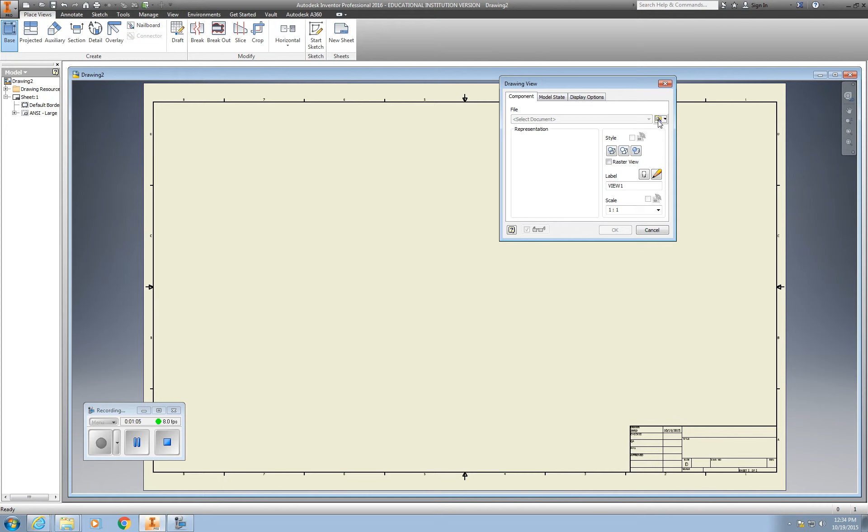First thing we want to do, if you look at your sample drawing, is we want to make it look like the following drawing. So I'm going to go up to base, and I'm going to the little magnifying glass inside of a yellow file. It's an existing file. And remember, keep all the files closed. We will go find them in this way. So I'm going to be looking now for our part 1.

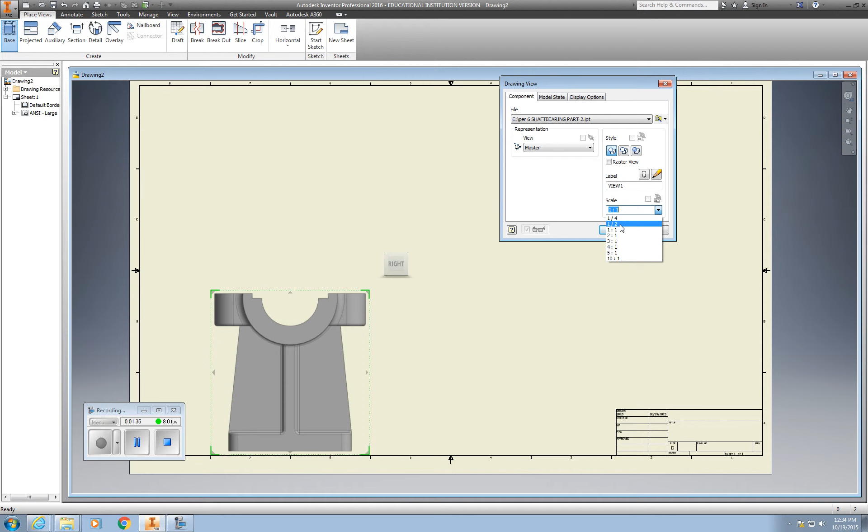And it's going to look like this. And that is actually the scale we want to use. Now I do want to turn it, so before I place it, I'm going to rotate it in this fashion. And the scale for this will be 1 to 2. 1/2. So then I'm going to go to the right, and I'm going to drop my right side view. I'm going to go up above and drop my top view.

And once the three are there, I'm going to come over and I'm going to place my isometric view right here, and then right click OK. So now those three parts are made the way we want them, and they're in hidden, as you can see, with the wire frame on. Now, that is the part 1.

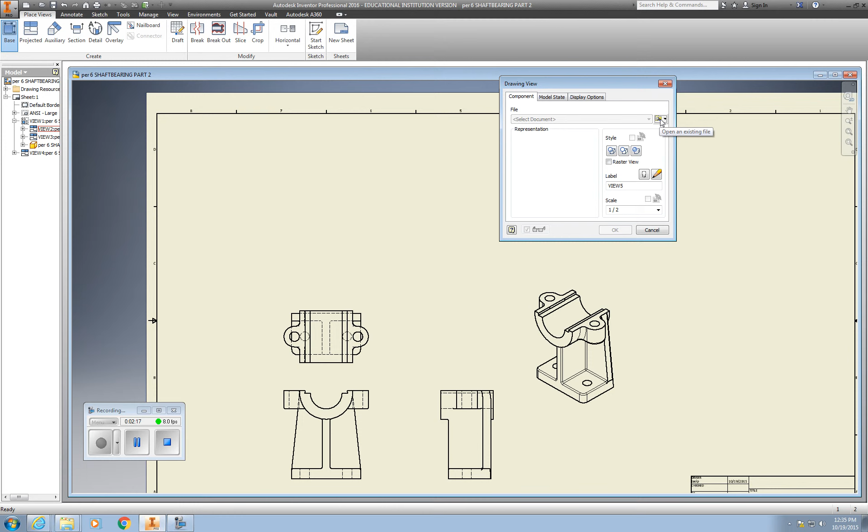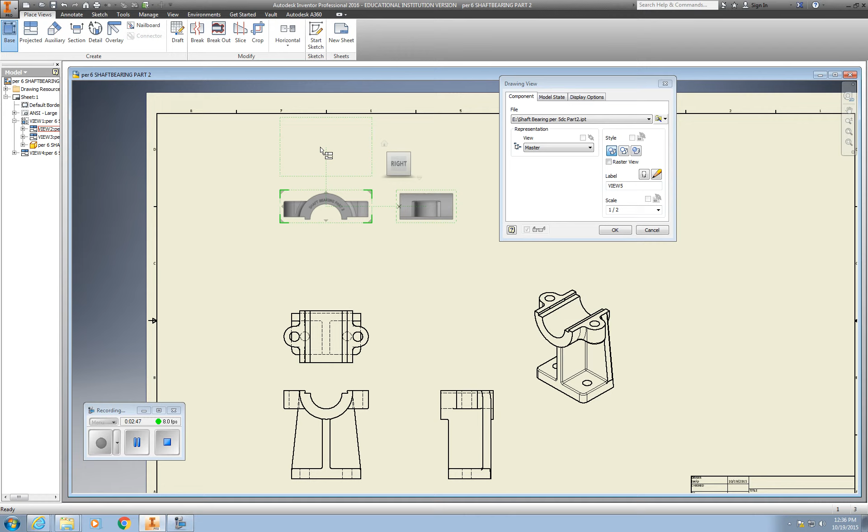I want to bring in part 2, so I'll go up to my base, go to the yellow file, and now I'm looking for my second part, part number 2. And there it is. Double click. Now I would like to bring it in the following way. So I'm going to rotate it as shown, and then put in my right side view, then my top, and then my isometric.

Let's try that one more time. So we're changing its view, then coming over, placing the top, right side, and then our ISO, and then right click, pick OK. And now we have them placed approximately. Now we can move them. As you can see, they're all attached.

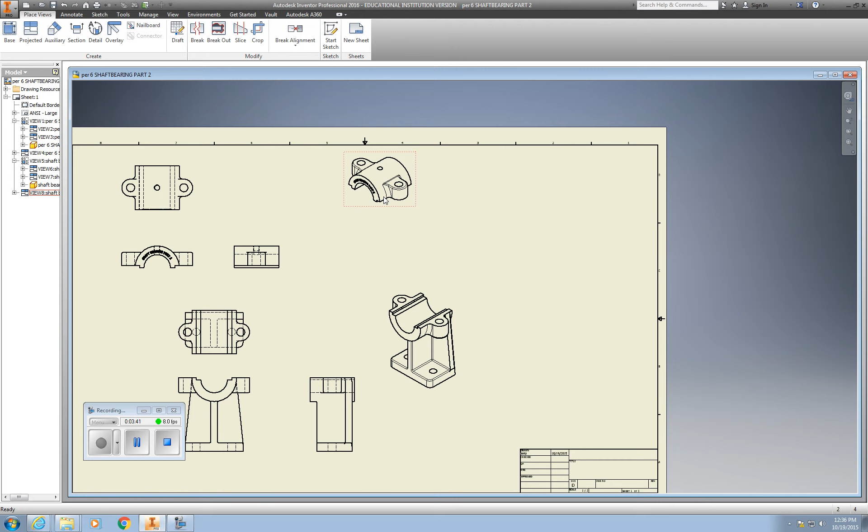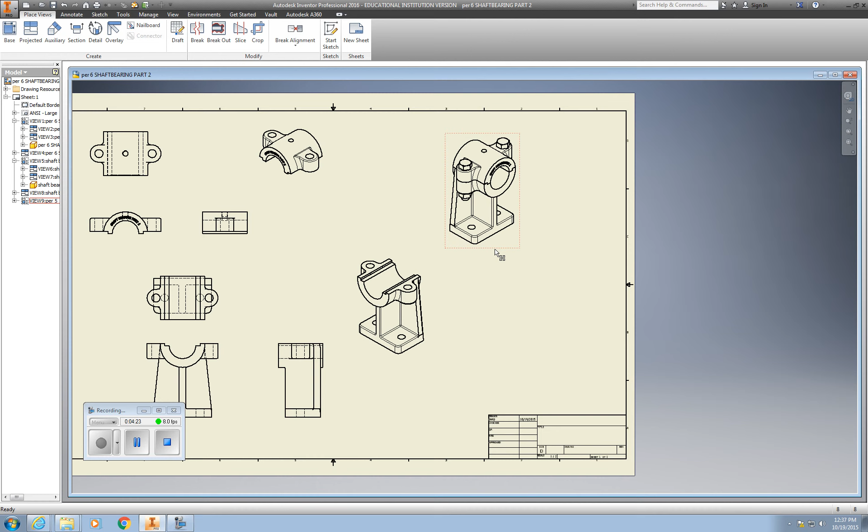Now my next step is to bring in my assembled with the bolts already attached. So I go up to base, and I'm looking for the assembled with hex bolts. And there it is. So we'll double click, and we want to place it in this fashion by clicking on the corner of the cube, then right click, pick OK.

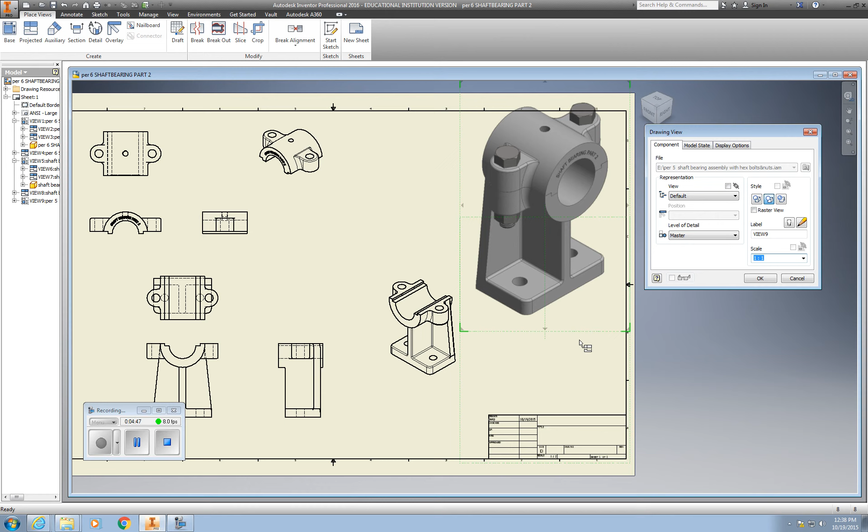Now what we'd like to do is bump these up in scale also. I would like to make them as large as possible so the person that's making the part, or the fabricator, can see what it's going to look like fully assembled. So I'm going to right click on the red edit box, and I'm going to bump the scale up 1 to 1. And then right click, pick OK, and we'll move it down.

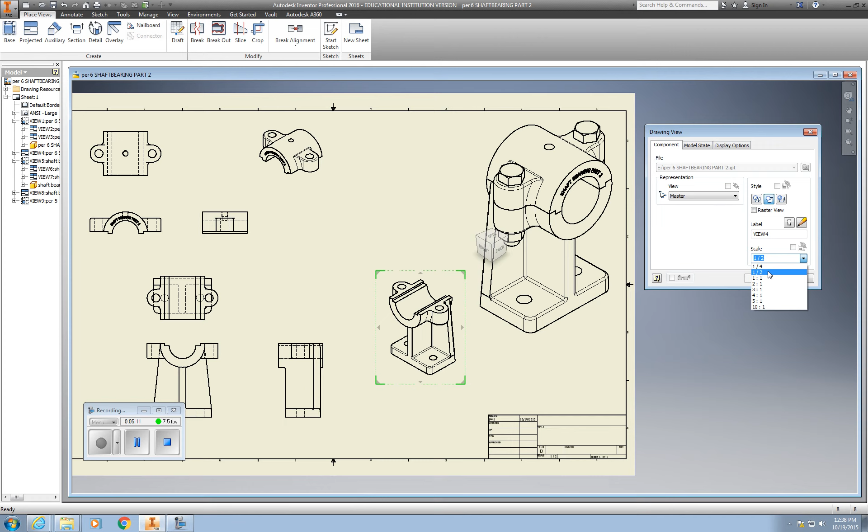And we'll do the same with the base. So we'll edit that, change it to 1 to 1, and move it so it's not taking up too much space, but it's in a position where we can actually pick OK. And now we also want to make that hidden and shaded. And also the part 1, edit, hidden and shaded.

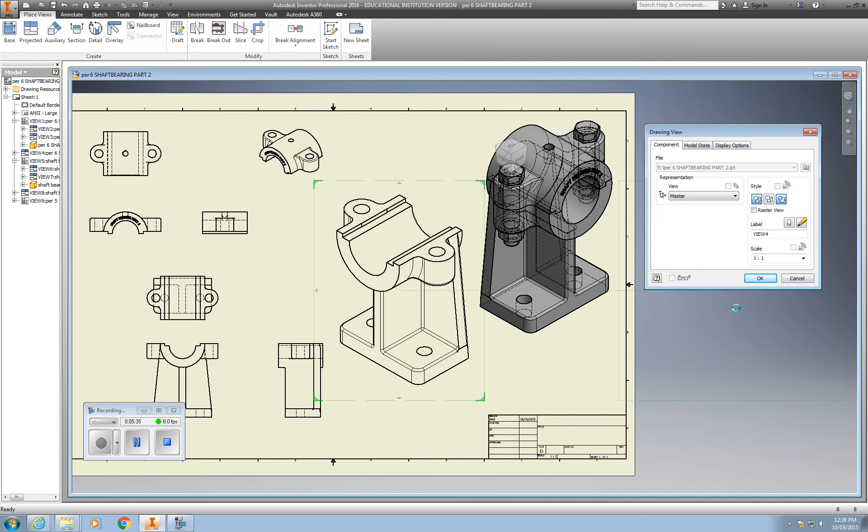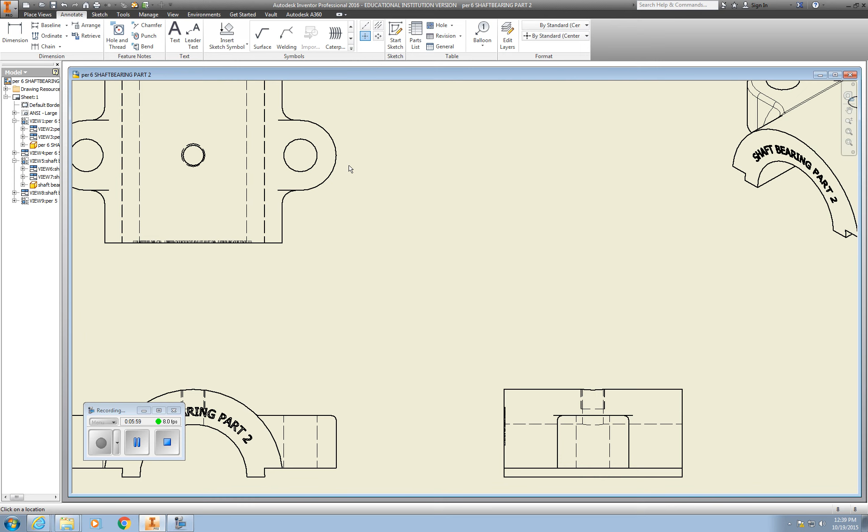Okay, now we can proceed to line up our parts, and we can then start our annotation, which is going to be our dimensioning. And we also want to put in at this point our center lines. So under annotate, remember when we're doing centers, we're using the center mark and selecting the largest circle that represents that particular circle. And we have several of those, so it is safe to pick the radiuses if you like. Don't forget the hidden line circles as well. And then we have one down here.

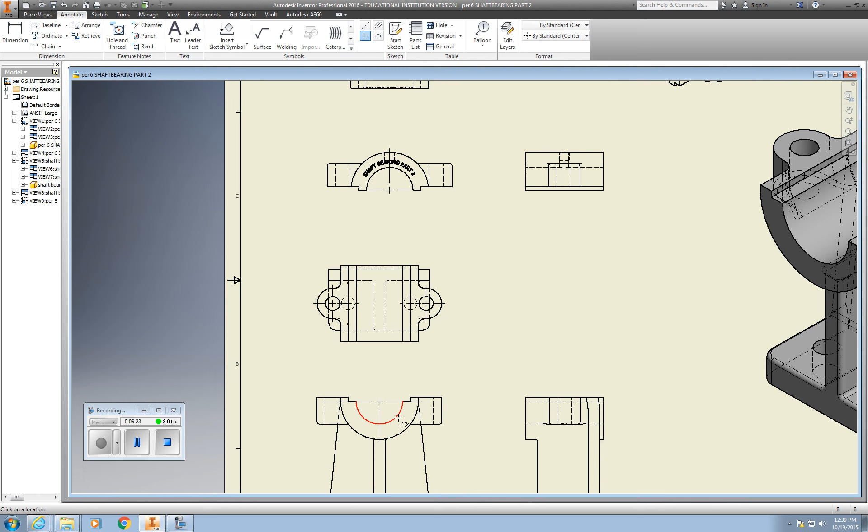Okay, and then we're going to put in what we call now our bisector lines, center bisectors. And you just pick a hidden line on the right and a hidden line that balances on the left, and it gives you that center line that's going through the piece. Here we have side views of a cylinder, once again bisector, and on the other side.

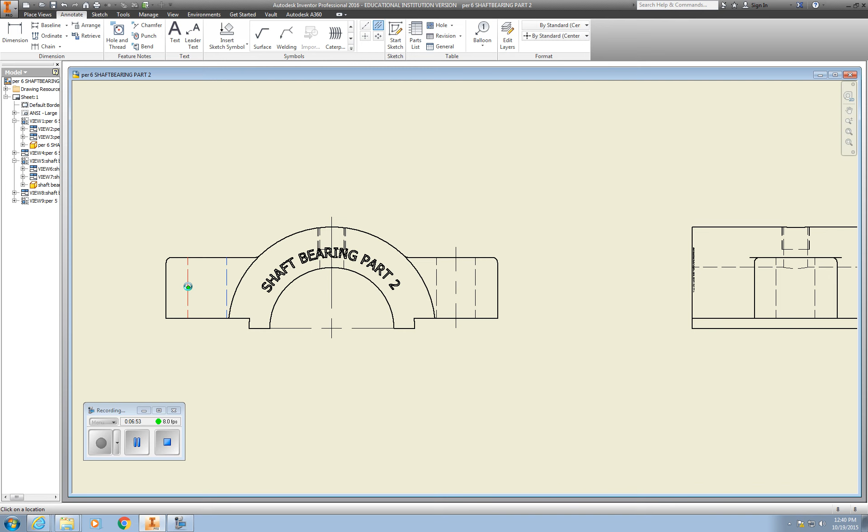And we also have that occurring here, and also don't forget up above. And that takes care of several of these. There you can see we have to put one through that direction. And we have several down here as well.

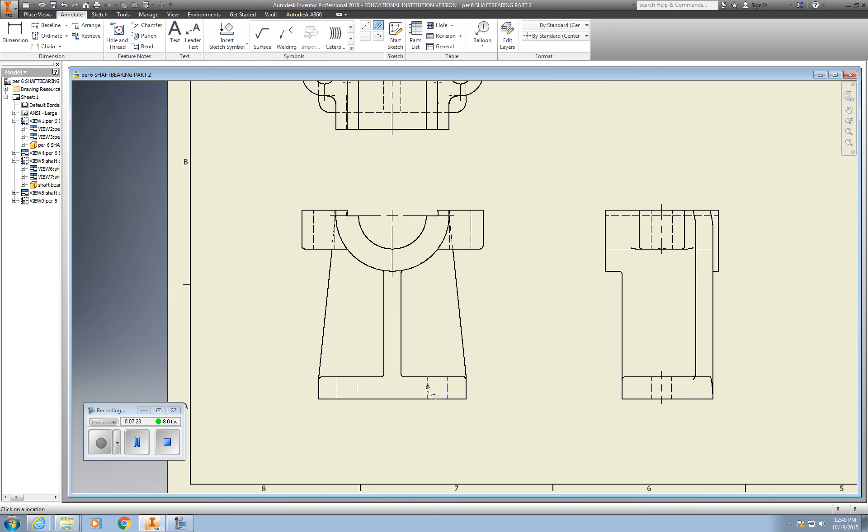And at this point, the students can take over and finish with their dimensioning and adding their text. And make sure you follow the drawing sample as a rubric for this.